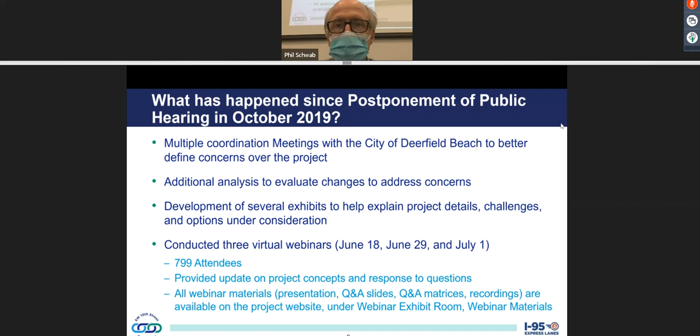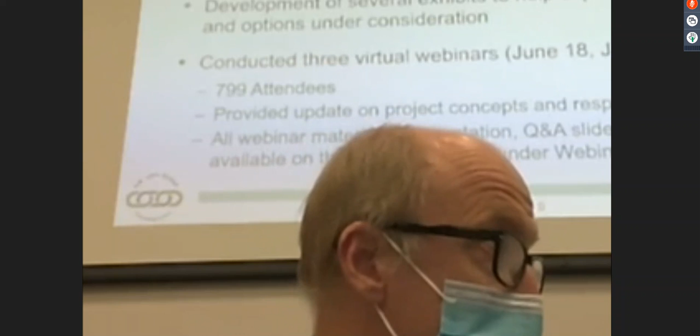Okay. Mention the virtual webinars. Yeah, I'm just looking at you, Phil. Your camera's on, I think. I'm sorry, folks, I'm running into a little technical difficulty. I've kind of lost the screen on mine. Yeah, I think I got kicked out.

As Rob mentioned, we've been coordinating quite a bit with the city of Deerfield, trying to address some of the concerns and improve the project, to make it a project that everybody's more happy with or more accepting.

We completed our draft analysis of everything, and that's what we're moving forward with at the public hearing. You'll hear a couple of options that the project has that we want to make sure you understand, and provide whatever feedback you'd like on that.

We held three virtual webinars back in the summer, very well attended. A lot of people got a lot of information. I hope everybody here attended those. This is just an extension of that, plus some additional information and things we've addressed throughout.

All right, so everybody's familiar with the location. The important aspect of this graphic is really showing you that there is a Southwest 10th Street study, the blue area in the middle of the screen, and then we also have a study for I-95. We're really hand in hand with that project, particularly showing how the connections are made at 95. They are planned to move forward together in construction.

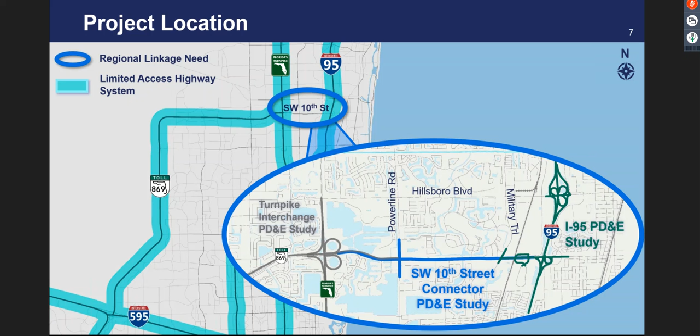Also, to the left of the screen, the Florida's Turnpike Enterprise, part of the Florida Department of Transportation, is conducting their own project development and environmental study, looking at adding capacity or lanes to the turnpike as well as the Sawgrass Expressway. They're also looking at improving the interchange of the Sawgrass and the turnpike. That project is in an earlier phase of development, although they do expect to come out to the public and present some of their working alternatives early in 2021, to get feedback on their concepts from the public and engage with stakeholders. Next slide, please.

This slide really just shows that regional area, giving a high-level idea of the traffic and vehicle trips throughout the corridor. If you look at these red arrows, basically from Southwest Broward County up through Northeast Broward and Palm Beach County, that's 51,000 trips per day trying to cross through this corridor.

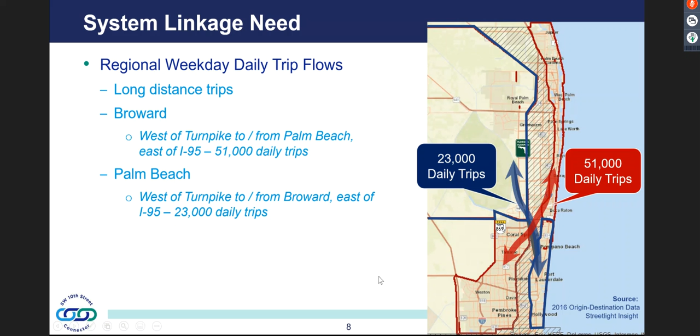Converse to that, if you're looking from Southeast Broward to Northwest Palm Beach County, or into the west side of Palm Beach County, it's about half that, 23,000 trips making that movement. So this project is really a missing link to help satisfy that transportation need trying to get through Broward and Palm Beach counties.

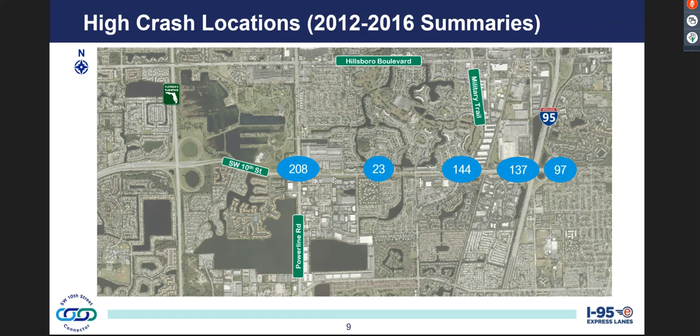This slide identifies the issues that have come up through the congestion that's grown over the years as the population and traffic have grown throughout the county and this corridor. We've seen an increase in crashes along Southwest 10th Street. What's highlighted in blue is the number of crashes at these intersections between 2012 and 2016, and it actually puts this corridor on the Florida Department of Transportation's high crash list for the state.

Next slide, please. Okay, any project like this, any project development and environmental study we do, we really start with the purpose and need. These five bullets summarize the needs of the project and the purpose of why we're here. I mentioned congestion already.

So basically addressing the congestion issues that cause safety and operational concerns is one of our main points. We know Southwest 10th Street, through the congestion, has its own issues and aspects that are very important to us for local businesses and residents. There's a lot of businesses along the corridor, particularly at both ends, with large distribution centers that use this corridor for their transit needs, as well as local residents who use it daily.

So by improving this project and adding capacity, we're going to enhance the intermodal and economic development of not just the region, but also this area in Deerfield Beach. And importantly, we're going to improve emergency response times for any incidents that occur and allow for better evacuation operations.

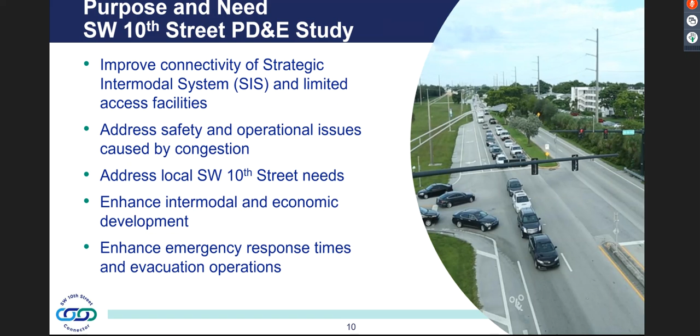I-95 has its own purpose and need, if you will, very similar to Southwest 10th Street. It's highlighted by the capacity and operational deficiencies right now, and what we're planning is improving that by adding additional capacity for the express lanes and improving those interchanges, both at Southwest 10th Street and at Hillsboro Boulevard.

It's also going to improve evacuation and emergency services, and help with that transportation demand. Many of you use I-95, so you understand that. And it's going to help build that overall system connectivity.

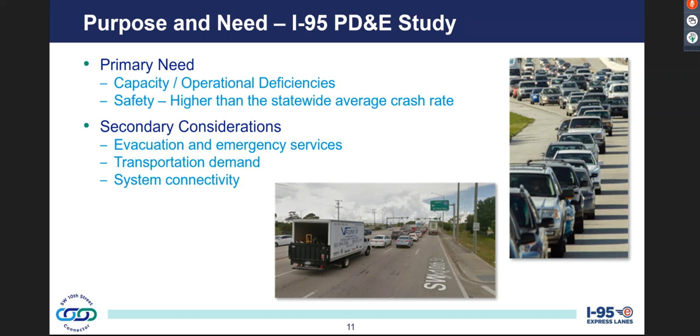Next slide, please. Okay, I'll go ahead and turn it over to Phil. He's going to talk a little bit more about the project detail.

Now we have a question here. Okay, so my question is to the previous slide.

Trying. Are you controlling this? Yeah.

Okay, so assuming the December meeting is a continuation of last month's project, at what point does this leave the mode of being a study and become an official project? Hey Rob, you may want to repeat the question for everybody. I think the question was, at what point does this PD&E study become an actual project? When does it go into the design phase and move forward?

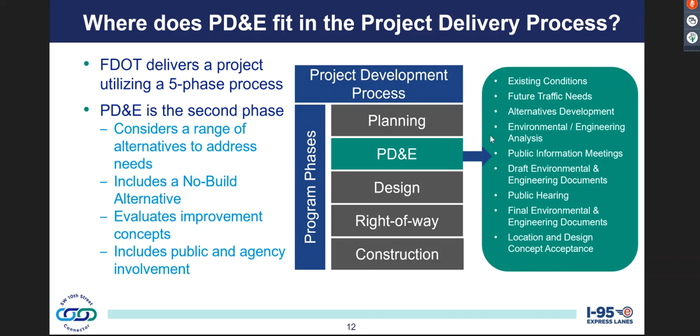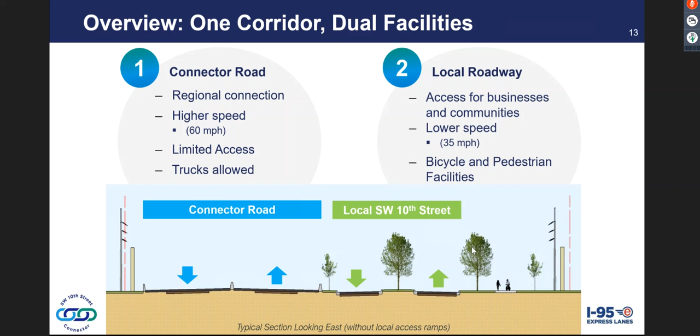Okay, so the project has really two facilities in one corridor. You see on the left, the connector road, that's on the north end of the corridor. This is just a section view looking to the east. The connector road will be on the north side, 4 lanes divided, higher speed, no stopping throughout the corridor. Trucks will be allowed, it will not be tolled. We estimate the design speed to be 60 miles per hour, whereas on the local road it'll go to a curb and gutter that you see on the right. It'll accommodate bicycles and pedestrians, and I've got another slide to talk more about that. It'll be a lower speed, 35 miles per hour.

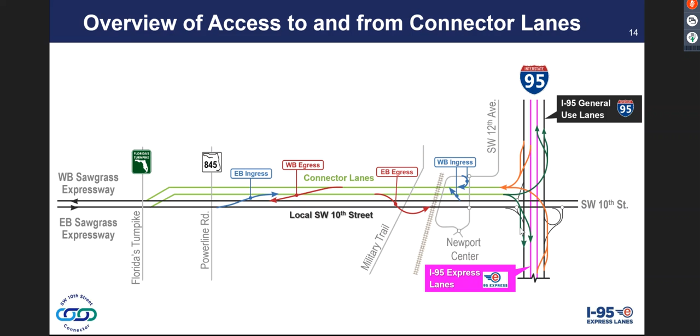So the connections on the west end at Sawgrass Expressway, the connector will go directly into the connector, so it is an extension of that Sawgrass. When you're going westbound, you can continue on the connector lane, or if you're in the connector lane, you'll be able to continue directly onto the Sawgrass Expressway westbound.

And then if you're already on the Sawgrass going eastbound, you'll have a choice to either stay on or get onto the connector road or go to the local lanes. So it'll be a left to the connector lanes, a right to the local lanes.

And then over at 95, if you're already on the connector lanes, you'll be able to access north and south, both express lanes as well as general purpose lanes on 95. That's a big change from what we had done a year ago. Before, we were just making a connection to the express lanes. Now we're making them to both.

That was a request by the city. They actually wanted to focus on the general purpose lanes, but we were able to make both connections. And what that actually does, it improves operations at 95, less weaving because people are going right into the lanes that they want. It also removes even more traffic from the local lanes because now people won't have to get out. They'll have more accessibility to the roads if they go into the connector lanes.

The areas in between are what are called local access points, local intermediate access points, so that the local road will have more of a connection with the connector road. And this was very important prior to making all these connections to 95, primarily to make sure we're getting enough traffic, a balance of traffic between the connector and the local lanes.

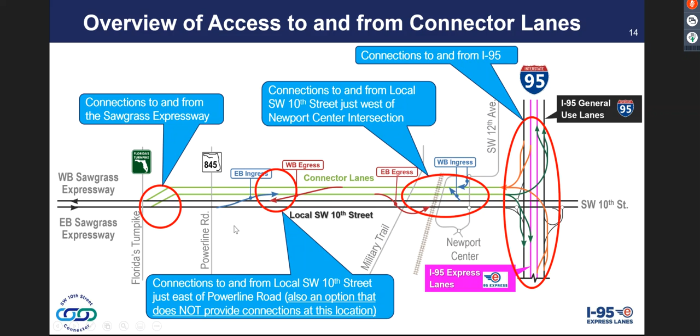So just going back in history, a lot of public engagement, as Rob mentioned, and it has created changes in the projects. So we continue to solicit the feedback and get the feedback and make adjustments where we can and try and improve wherever we can to make it a more balanced project for everybody.

These are just some of the illustrations of what was determined back in April 2018. We settled in on the northern alignment. We also looked at trying to reduce some of the impacts that the project was creating.

And then in November of 2018, this is where there was a big push to allow trucks in the connector lanes, which we have allowed. We moved the bridge further to the west away from a waterways entrance. We're not tolling the connector lane, but we did settle in on the westbound depressed ramp as a preferred alternative.

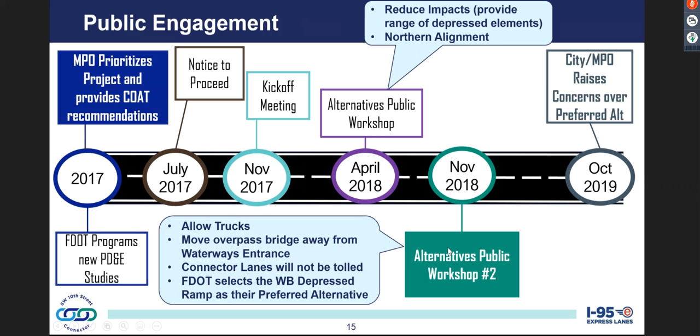And as Rob mentioned, we were going forward and looking like we were going to have a public hearing, and there was several concerns that were raised by the city, and we postponed that hearing. This slide just represents the 5 big concerns that they had mentioned to us, and the first one is dealing with the connections to 95.

And I said, we're making those connections now. So we feel we've addressed that fairly well.

The complete street element, what we've done is move the bike lanes from the pavement and increase the width of the sidewalk to 12 foot. So we have a shared use path that goes the length of the corridor. It actually goes up and over 95 to the east, so it's a continuous shared use path that'll accommodate both pedestrians and bicyclists.

Item number 3, I know it's a star, but it's just meant to be not a check mark, just because we know we're not increasing the depressed section more than what we were. And that was a concern.

What we have done, though, is we have created more green space. We have completed the noise analysis that warrants noise walls for all the residential areas that front Southwest 10th Street. So all those areas are warranted for noise walls.

And we've also looked at and enhanced our renderings to show a more likely landscaping scheme as part of the process. But I've got some slides trying to explain some of the challenges we have in depressing more of the road than what we are, and what benefits we'd see with more depressed lanes. And then the not-enough-green-space issue, we've addressed that in a couple fashions, and I'm going to have some slides to explain that.

One of the bigger ones is the change in the alternatives, the option of with and without ramps, because it creates quite a bit of green space in some options, particularly in the center of the corridor where Waterford Homes is. It actually has a huge impact on Waterford Courtyards as well as Waterford Homes.

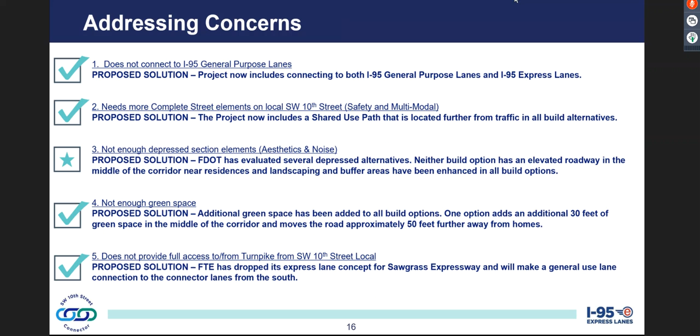I believe we also have a hand raised. Is that true, Miranda? Yes, okay Mr. Albert, but I can unmute you, can you try unmuting yourself? I don't think he has a microphone connected. All right, you can keep going. Someone can chat with the person with their hand raised. I don't see a microphone for them. Yes, so they may have to type it in if they don't have audio. Mr. Albert, please continue. You can also submit your question through the question box.

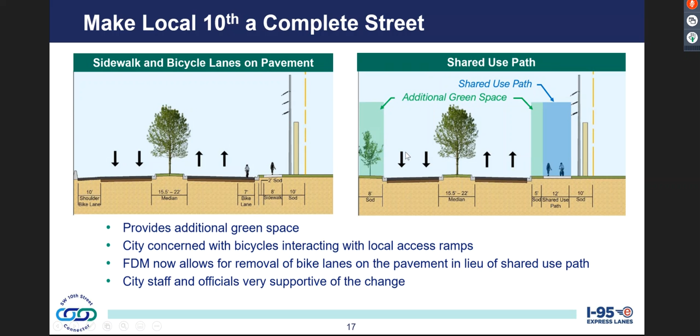But I'll reach out to a couple of areas that I'll focus in on through the presentation. The complete street, just to make sure everybody's clear on what that means or what we're doing. Again, we show a shared use path as the base concept now versus having bike lanes in the pavement and a paved shoulder. And what that does is create even more green space opportunities, landscape opportunities for the roadway.

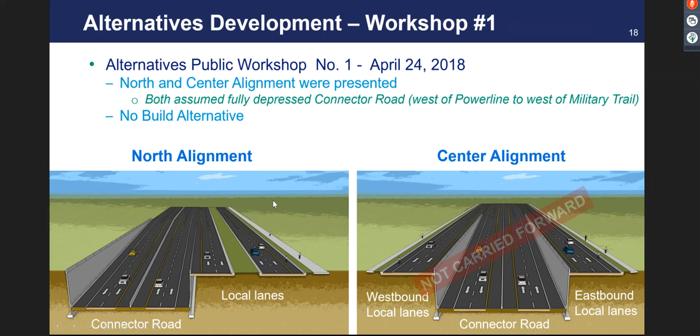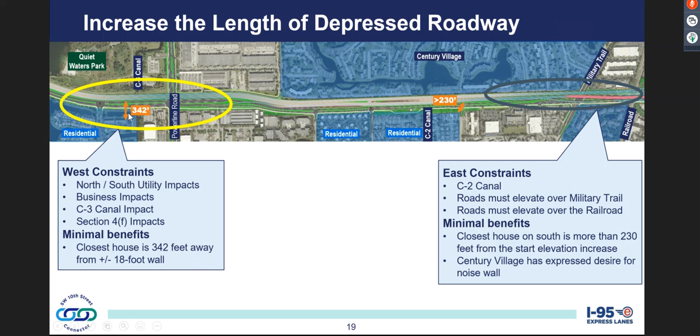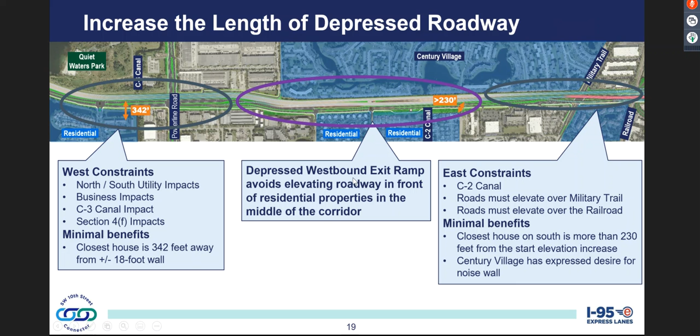We also have the park over here, where our project really needs to avoid any impacts to the park. It's critical as part of our environmental process that we look to avoid that. Again, the homes are fairly far away from where the actual raised road would be. This area is further away, with a bit of a lake buffer or canal buffer. But in the center, this is where we do the westbound depressed ramp, where we see the opportunity to avoid that elevation by depressing the westbound ramp. That gives us an opportunity, and you're going to see more on that in a minute.

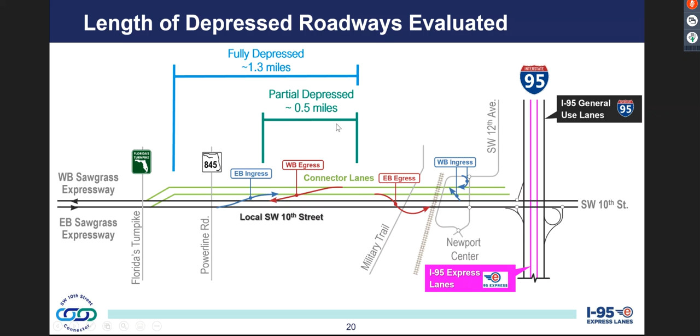So there's different ways to do that: have it go over the connector road and depress all the connector road in this section, or just depress the eastbound connector road. Where we ended up settling on was just to depress the ramp, minimizing that depressed area to keep the rest at grade elevation.

So at that point, we decided we weren't getting enough benefit for the impact it was creating, and we settled on that westbound depressed ramp.

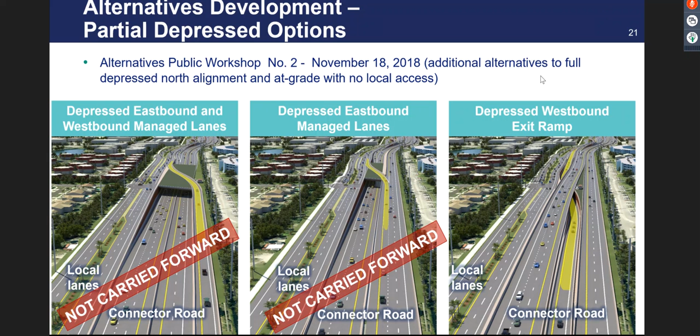Let me continue, and if there's any more questions, just raise your hand. We talked about that, so now we want to talk about the green space, which is what I was mentioning.

We really have an option to either construct these ramps or not. This particular red ramp is the westbound ramp from the connector lane that goes under the eastbound, so this is the depressed section here. For the Newport Center ramps, we looked at whether we'd get a benefit from removing those for green space, but it's all elevated in that area anyhow. We really weren't gaining any green space, and it helped get traffic off the local streets, so we're not proposing to do anything different at Newport Center with those ramps.

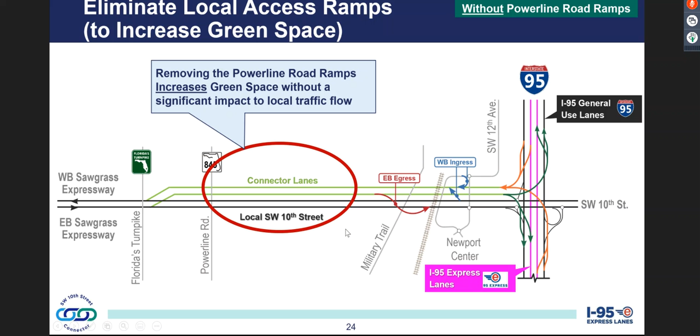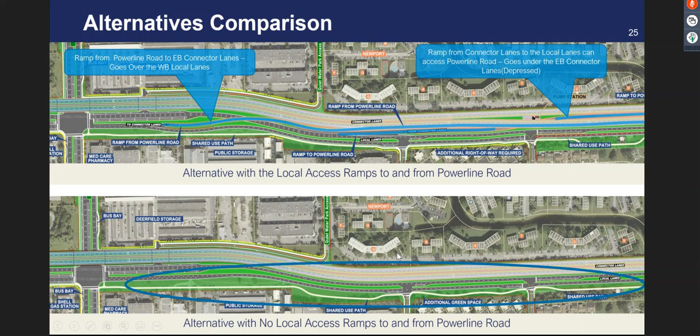To get an idea of with or without ramps, the limits of the change really affect this area between Military Trail and Powerline. That's the influence of those ramps—starting the ramp and ending it, or connecting where you'd have that extra lane anyhow, because you have to form an exit lane in order to get off the connector lane.

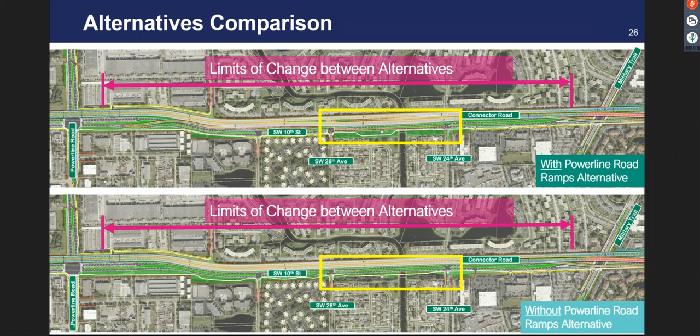So we have a blow-up of an area here, because I know offsets were very important. We had talked about this with some of the HOA board members before, and they were asking about offsets, so we'll have a graphic showing a close-up of what they look like. Again, the connector lane is the light gray, the dark black is the local lanes, and you can see Waterford Homes right here.

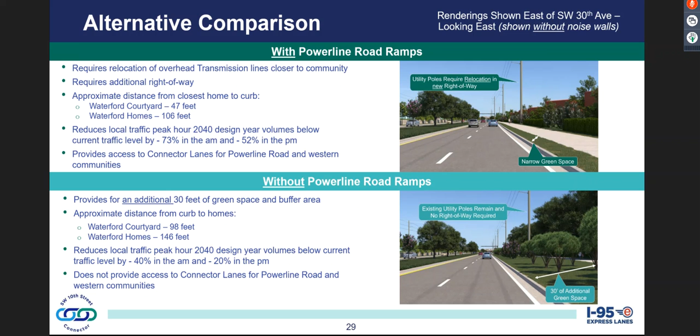Phil, I think you're on mute.

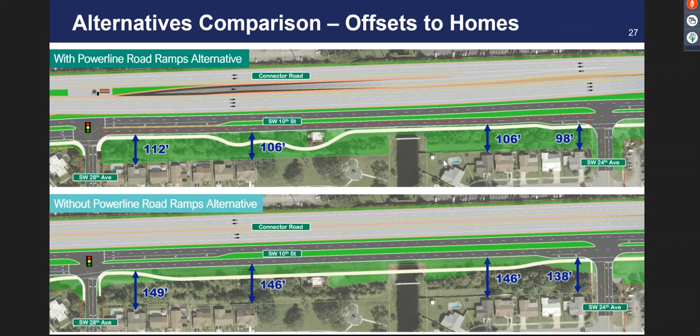Now I just got a text saying no audio. Monica, are we good? We hear you. We hear you now, I unmuted. Yes, we can hear you. Anybody? Oh, we can hear you. Okay, all right, we're going to keep going. It's like we're in a trap box here.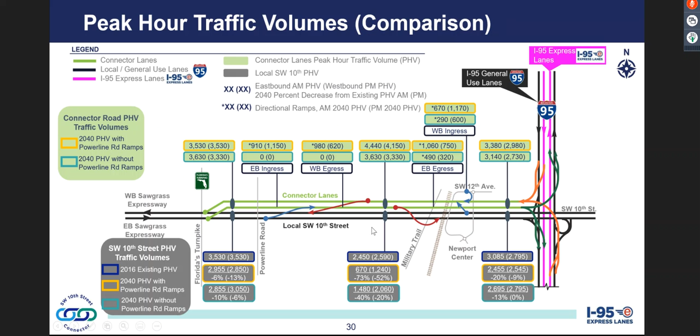For traffic flow, if I'm driving on Southwest 10th Street, the local travel time through the corridor will be the same in the local lanes with or without the ramps. The ramps really provide accessibility, particularly along Powerline and to the west, and they help reduce peak hour and daily traffic volumes in this area. But since the numbers are still fairly low, the travel flow will operate the same with or without the ramps.

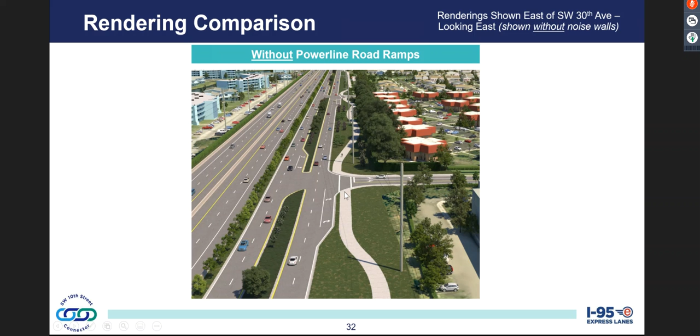When I click this, it transitions to the without-ramp option, so you can see the effect. If we did not build the ramps, we get more green space — the large trees get to remain, and these poles stay in their same spot as today. I'll show the with-ramp concept again quickly, then without. Both concepts have a 12-foot shared use path. Without the ramps, we're able to meander the path a bit more and add more landscaping because of the additional green space. This is just a side-by-side comparison.

And now I do want to talk about noise walls. I know that's a big item for most residential areas, including Waterford Homes.

So when we talked about it before, we had looked at a wall that was really trying to provide the most abatement. I'm going to show you what provides the most abatement, which is our preferred option, but we recognize that more options need to be made to address all the concerns of the landscaping and the berm, which will be a trade-off as far as how much abatement you're going to get from alternative wall designs.

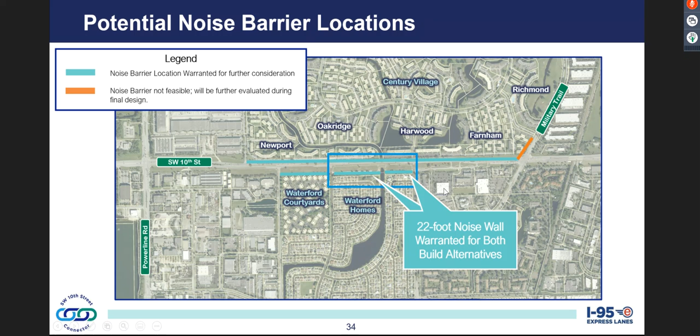So what you see here is what we had talked about just a couple of months ago. This is the Waterford homes, and typically we would construct a wall inside of the property line. This is a unique area because this property, between the roadway and the homes, is actually owned by the city. They have a city facility here and some wells that they get drinking water from.

So they're a major partner in whatever gets moved forward in this area, and of course they're a major partner on this project, getting it to the best they can before making any type of decisions on it. So what we're showing is the with and without ramps. Again, we're just showing an offset, as a reminder of what those offsets are to the homes. But this shows a ground mounted wall that would be 4 feet just to the north of your property lines.

And this would have an impact on that berm. Now what goes in front of it, how that gets worked out is something that we would work with the city and so forth.

But we have an option that can be warranted, but it doesn't provide as much abatement. And that would be to push the wall to the north, follow the path, so to speak, avoid the city facilities if that was agreeable to them, but then save some of the berm. We get tight in some areas and just try and salvage as much of that buffer as possible.

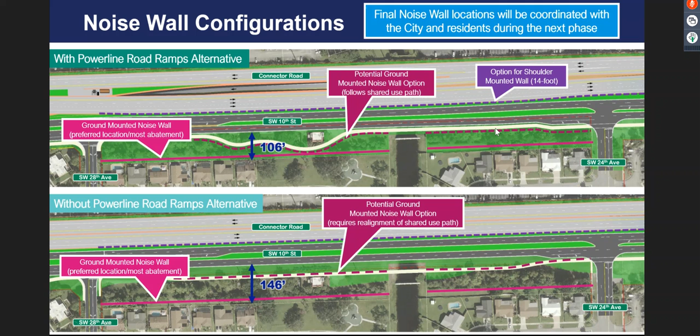So I want to talk a little bit about this. Typically it's the first and second row. I think we have a graphic that shows who would most likely be the ones surveyed for a noise wall to determine whether to construct it or not.

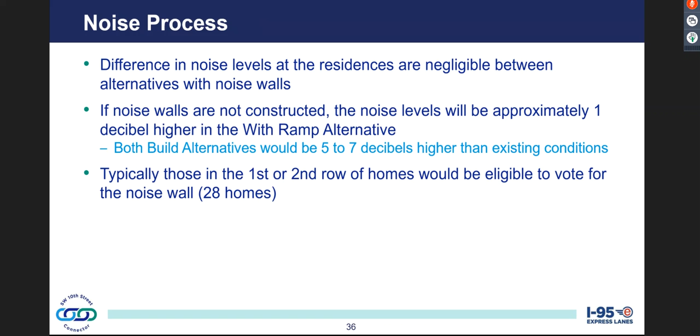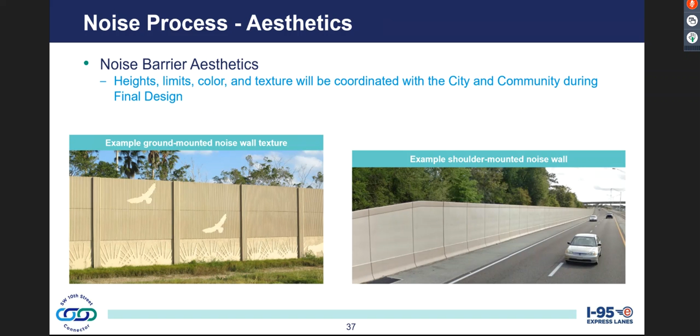And the right-of-way impact I mentioned, there's 9.9 to 18 feet at Waterford courtyards. The transmission lines with ramps need to be relocated about 30 feet closer to the homes.

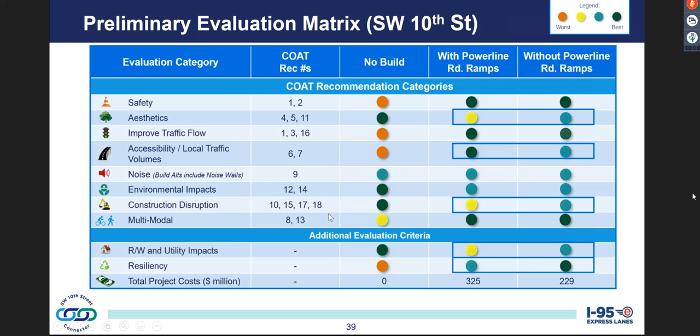And what I have is several renderings of the project starting on the west end, just to show you a few of these, mostly at intersections looking east and west.

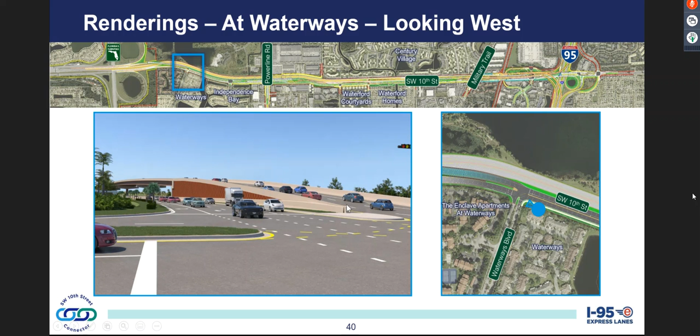This is right at the intersection of waterways looking to the west. This is the bridge that at one point was right in front of this entryway, that we were able to move and work the geometry to get it further west. This is from the same intersection looking to the east. You can see the shared use path.

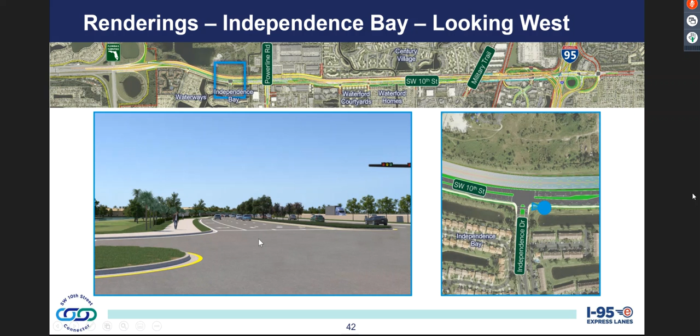Now this is up at Independence Bay looking to the west, and now looking to the east. This is the connector lanes going over Powerline. You can see Powerline in the distance. What you see here is the eastbound ramp to get to the connector lane.

I'm pointing that out because the next slide will show you without that ramp. It's very subtle, but you'll see that's with the ramp, and now that's without. It disappears, but you don't see too much. We're pretty far away with this picture.

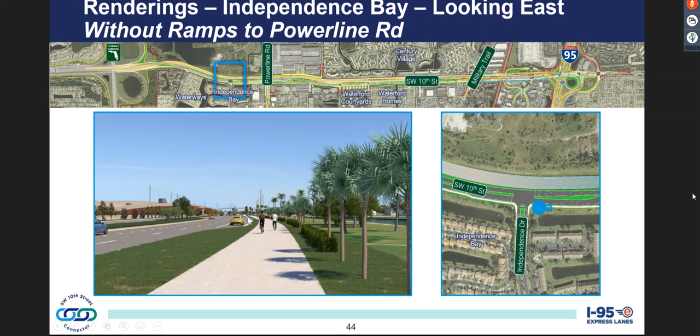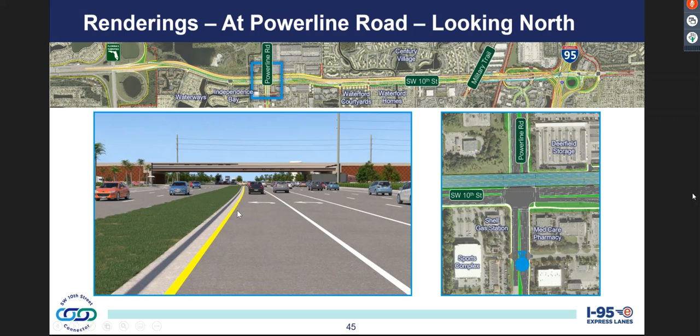This is just south on Powerline Road, looking north at the connector lane overpass. And this is at Powerline and Southwest 10th, looking to the east. There's a little extra green space here, so we placed some aesthetics, potential treatments. You can see the eastbound ramp right here.

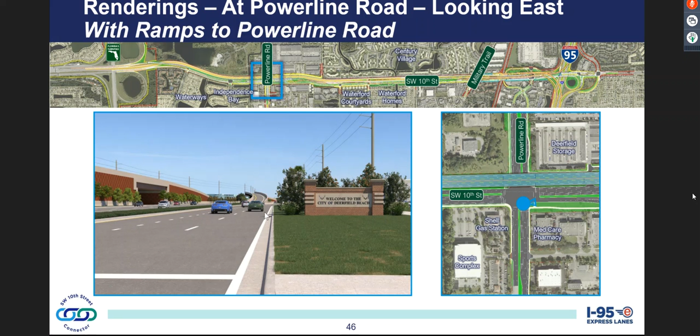If you wanted to get to the connector lane just east of Powerline, this is where you would go to the left and take a flyover the local lanes and get into the connector lane. And this is without that ramp.

Now as we get closer, this is at Waterford Courtyards, the with-ramp concept. Looking to the east, you see Century Village to the left. This is where the ramp would come up, so you see pavement here, a little bit of green, and then more pavement. This is where that westbound ramp starts coming up and surfacing before it ties in just east of Powerline Road.

And this is the without, showing the large landscaping that's in the right of way, which we would have to remove if purchasing 9 to 18 feet as part of that. The transmission lines get to stay in the same general location.

Here's another one, looking from the roadway. Again, this is the with-ramp option. So we purchased the right of way, and the landscaping, the large trees, are gone.

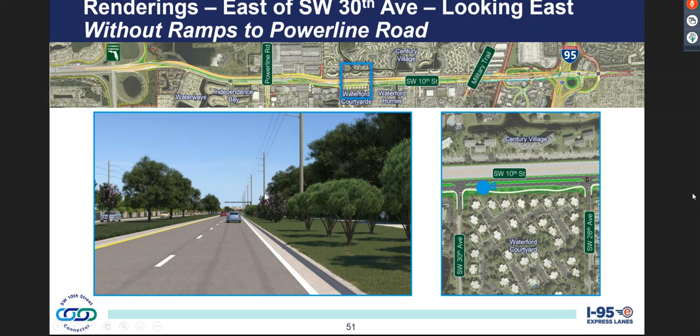Now this is similar to the slide before. We have extra green space without the ramp, and these trees get to remain.

This is an aerial looking down. You see that depressed ramp coming up under here. This is looking the opposite of that other rendering I showed you. This is going underneath the eastbound connector lanes, and you have that extra lane here from the eastbound ramp that comes in. And this is without, so you gain some green space here and you don't have those ramps.

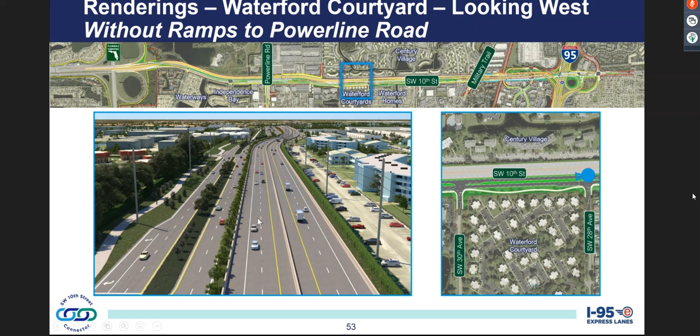And then this is one at 28th Avenue looking to the west. This is the with-ramp concept, and then this is the without.

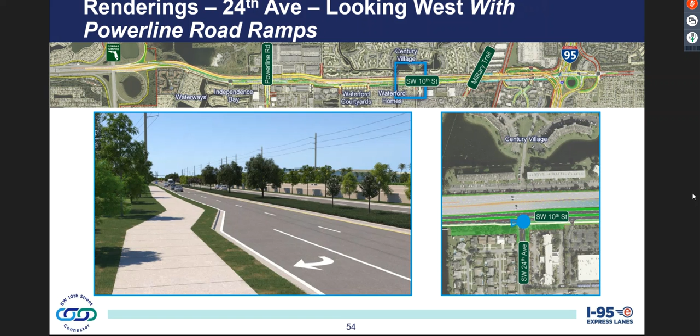We've got several around Military Trail. This is south of 10th Street looking north, where everything has to go over Military and the railroad.

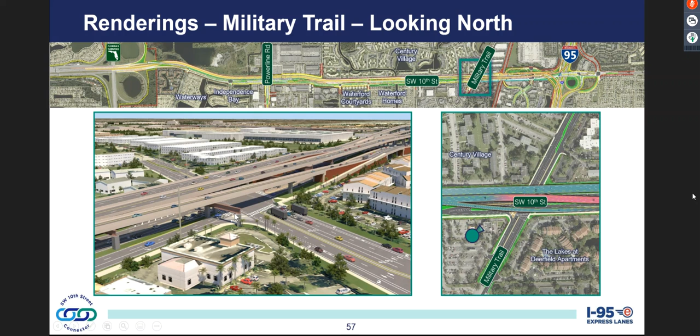And then this is from the south quadrant looking northeast at the same area. Again, we have the shared use path that continues. We're actually continuing sidewalk over here. This is Century Village on the left of this rendering. They don't have sidewalk there, so that'll continue to the north.

This is looking at the interchange now, we're getting at 95. This is Newport Center. You can see the ramps coming in and out of I-95 from the connector lanes.

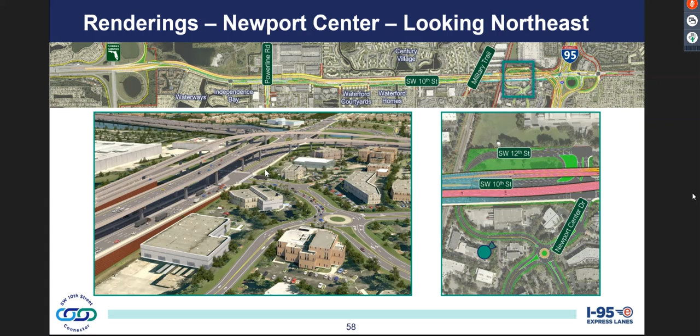This is straight down 10th Street. So we're over here by Nautica, looking to the west at the interchange coming together, the connector lanes coming together and going to the west.

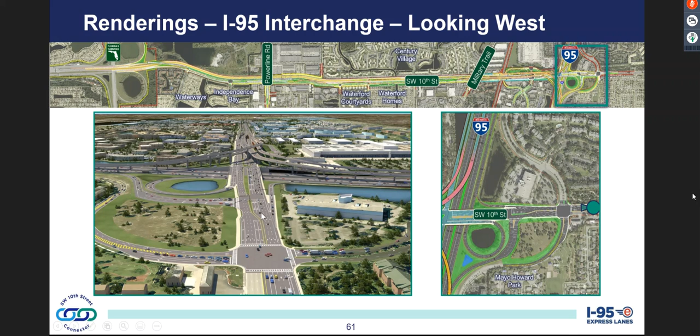And again, this is at the interchange, but looking to the north now up toward Hillsboro Boulevard in the distance, with the ramps being able to get to the general purpose lanes as well as the express lanes and vice versa from I-95, both general purpose and the express lanes.

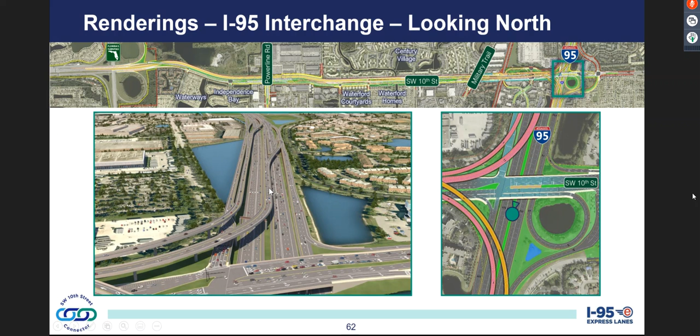As Rob mentioned earlier, we had several webinars, well attended, that provided a lot of information. We've been continuing with our HOA and stakeholder meetings in coordination with the city. We've also done a lot of updates to the adjacent cities who wanted updates. We've been putting out information on social media, trying to get people to sign up and register and attend.

A public hearing, which we have scheduled for next week. We have multiple virtual sessions on the 12th, 13th, and 14th, and we're also having an in-person session at the FDOT District 4 office on October 15th. We have 4 sessions set up for that, and COVID restrictions and guidelines will apply, just like we're doing here today. So hopefully you can join either a virtual or an in-person session, whatever you're more comfortable doing.

All the sessions are going to be the same. The comment period on the virtual sessions will be recorded and posted so everybody can listen to any comments that are made. The in-person comments will be taken by a court reporter, so they'll be transcribed. Once those are ready, they'll get posted on the website as well, so everybody will have access to all the comments made across the multiple sessions.

Registration is required. We're trying to monitor the group so that we can be as interactive as we can as part of the public hearing, and especially in the in-person session, to make sure we're abiding by all the social distancing and making sure people are safe.

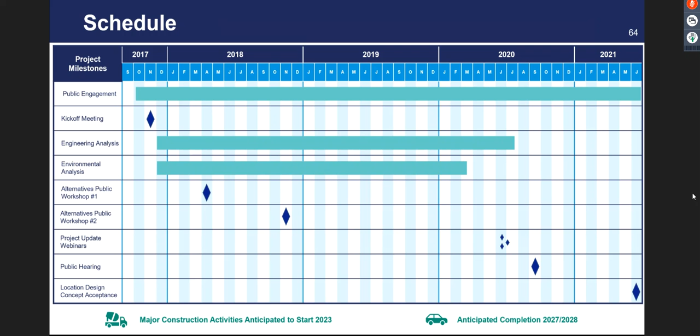So this is just a recap. I'm not sure if we have any questions.

I know we're having some audio difficulties. Phil, can you hear me? I know there was an email comment or question that came in, so I'm not sure if Monica or Miranda want to tell us what that question is. Anybody, Phil, there? Can you hear us? Anyone? Phil, can you hear us? All right, we can't hear you guys. Kelsey, can you speak? Can we hear you? Phil, can you hear me? Anything? I will send you the question via chat. Can you guys speak? All right, they have some chat going. Read the chat. Okay, getting a lot of... all right, so they can hear us, but we can't hear anybody else. So we're going to read the chat. Okay.